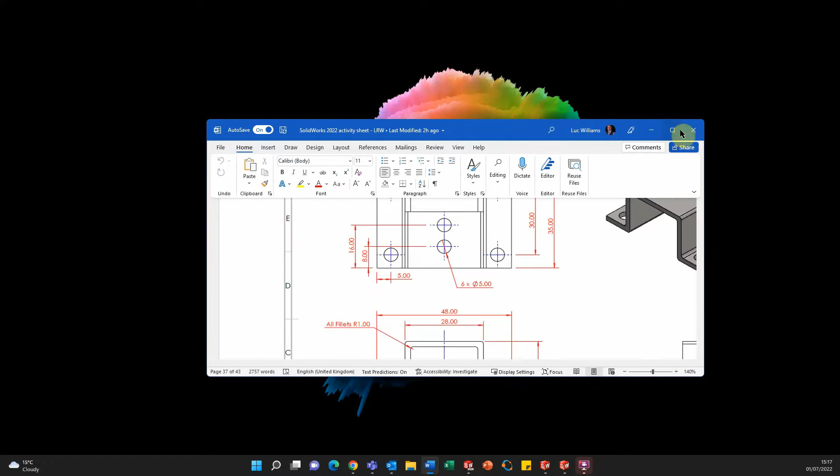Hi, so in this activity we're going to skip forward and look at exercise 4. Reason for this is exercise 3 is the easiest of the lot, far easier than 1 and 2.

You just need to sketch the outline and extrude it to 50mm, then check the weight. This is pure gold, and it's 8.62 kilograms. I'll leave this here for you if you want to have a go at this first.

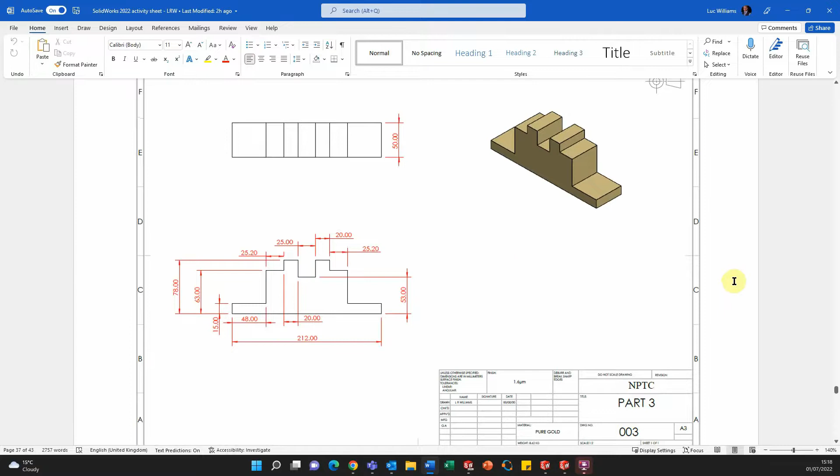So we're going to move on to create a steel bracket. If you want to have a go yourself, pause the video - here are the dimensions for you.

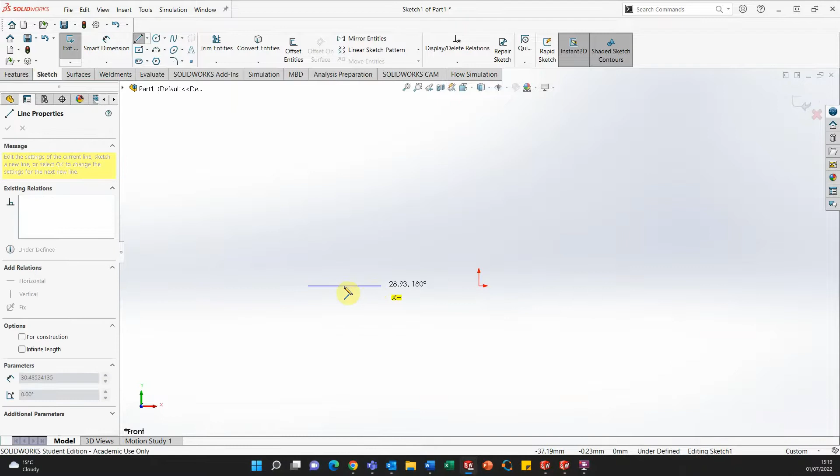Once you have SolidWorks opened up, we want to start a new sketch in the front plane. So what I'm going to do is just draw a rough outline of how the bracket looks - so it looks something like this.

I can make sure that the center of this line is in line with the origin, so I can just create a relation - I'm going to say this is vertical.

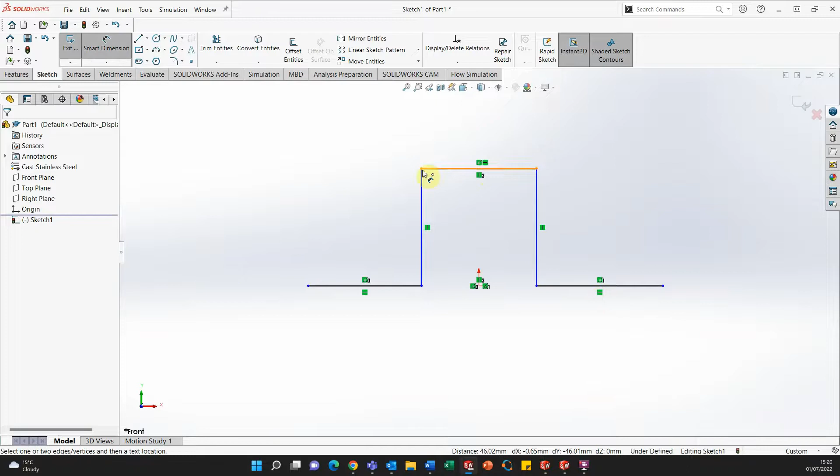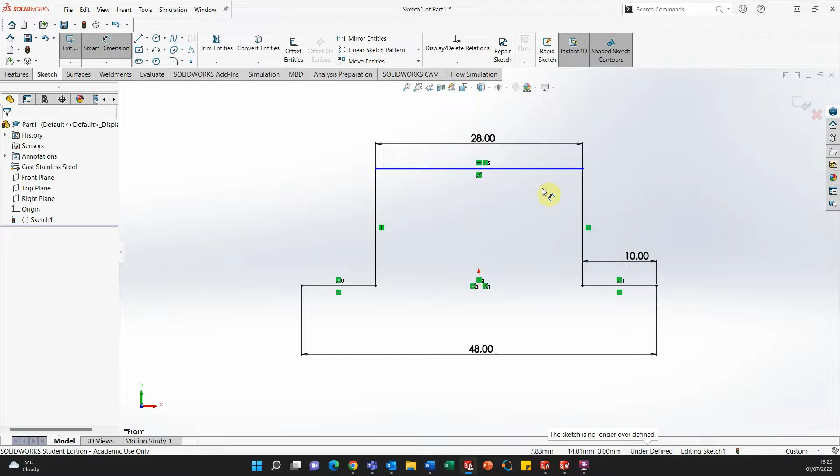Next up, I just need to add the dimensions. So in total, the length of the bracket is 48mm. The upper part of the bracket, the upper surface, is going to be 28. And then the bottom, let's call it flanges, are going to be 10mm each - so click X to dimension. We just need to add the height, so this is going to be 20mm.

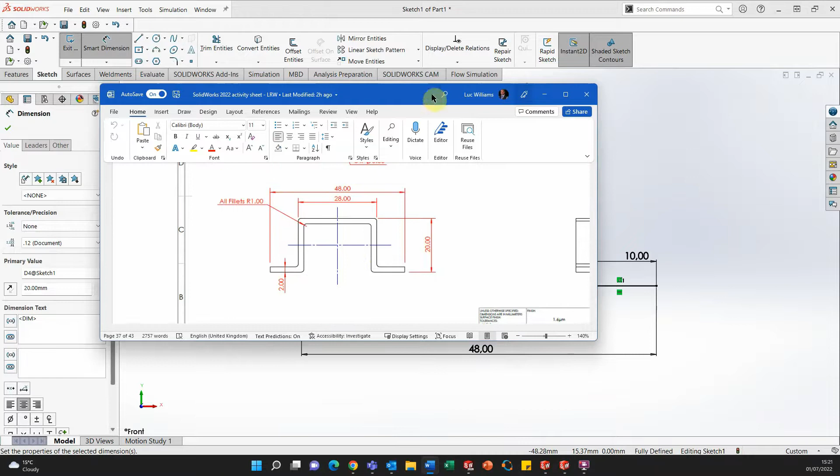Notice how I've only drawn the lines, I haven't drawn the outline like this. So we're going to use a tool called Thin Line Extrude - can help, it's a useful tool, help you save some time.

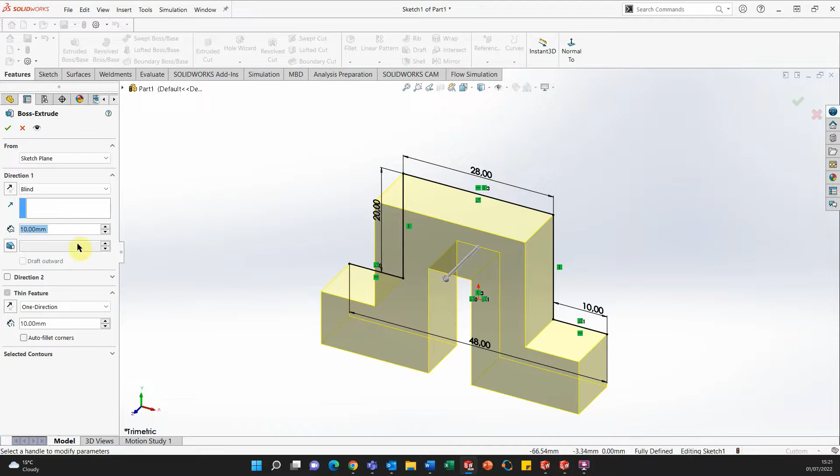So go to Features, go to Extruded Boss Base. Notice it's picked up the line and extruded in the direction to give it depth, and extruded these lines outwards to give some thickness. The total length of the bracket is going to be 35mm. For the thin feature, the drawing says there's a wall thickness of 2mm, so just type in 2 - and you can see this looks more like our bracket now.

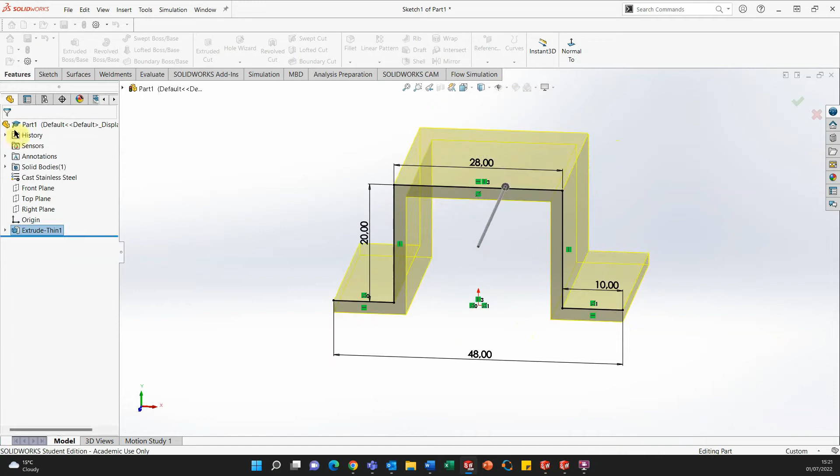Click OK. Alright, now we need to add fillets on each of the edges. So we've got 1, 2, 3, 4, 5, 6 edges we need to add fillets to. Similar to the other exercises, go to the fillet tool, and these are going to be 1mm.

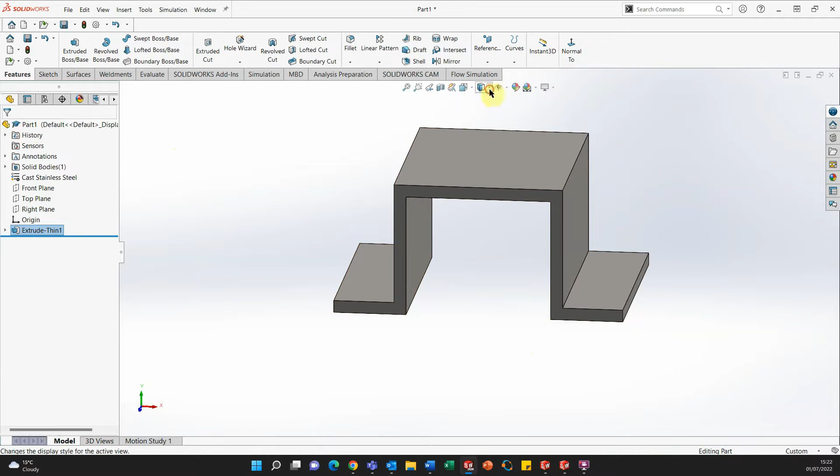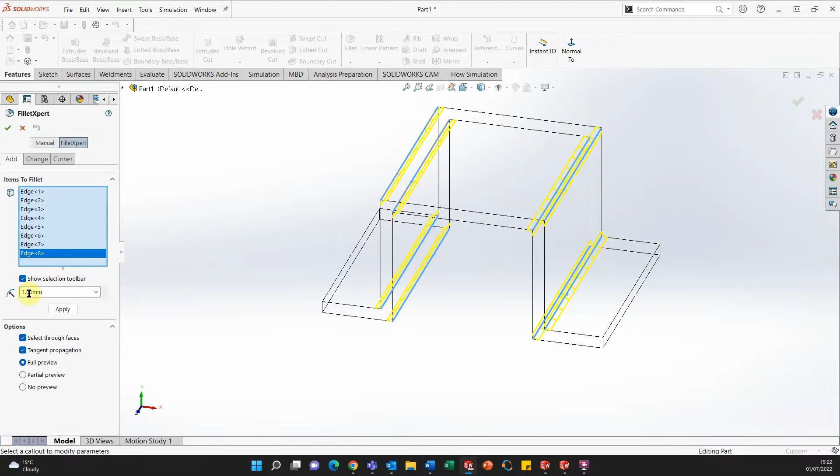Click X. I'm going to change the appearance to wireframe and go to fillet. So we've got this corner, 2 per here - oh, we actually got 8 in total, sorry, not 6. There we are, these are 1mm. Click Apply, click OK, and here we are - all fillets added.

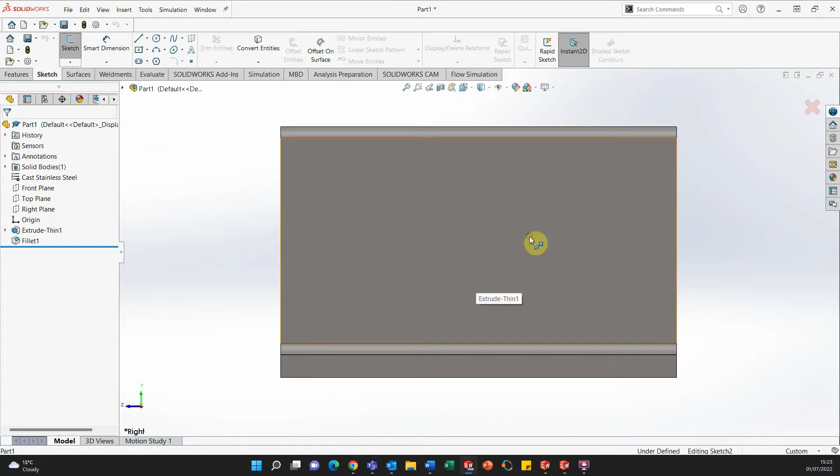So now what we need to do is create a cut at the back end of the bracket by here on the upper surface. I'm going to create a sketch on the right surface, and create a corner rectangle in the upper right vertex by here.

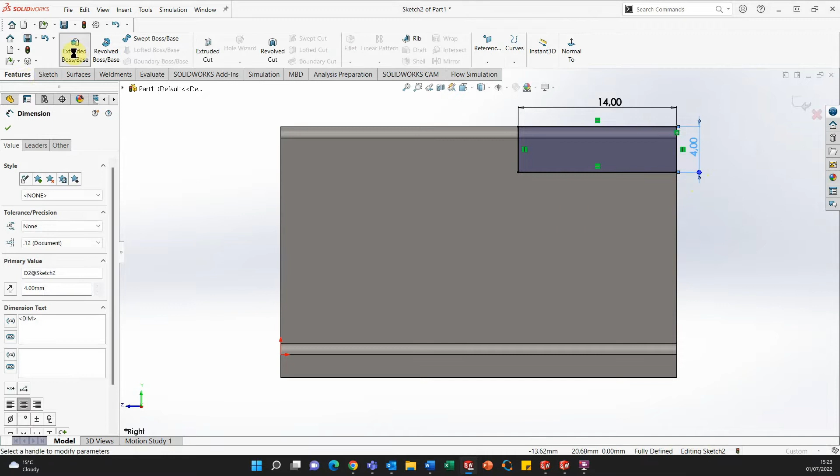Dimension this as 14mm wide and 4mm in height. Just cut that all the way through - oh, wrong button, sorry, extruded cut, through all. Notice it's cut all the way through the bracket. It's okay, so now it's starting to look like a bracket.

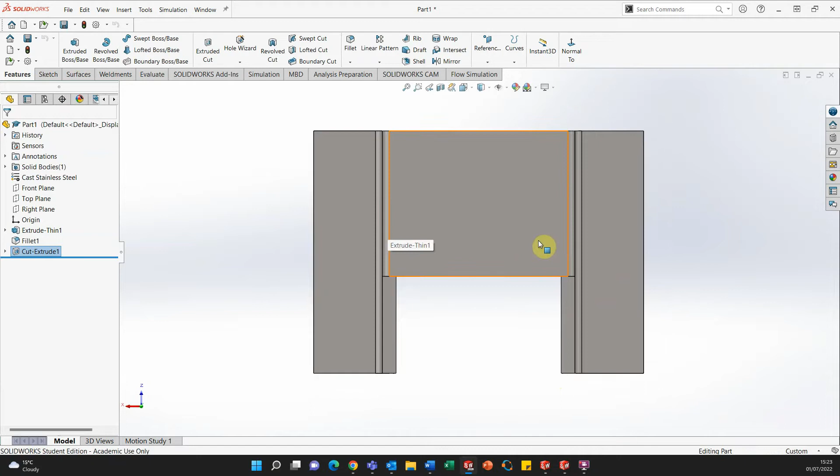We just need to add the bolt holes, or in this case just holes - 2 here on the upper surface and 2 here on these we call flanges. So we go to sketch, I'll start on the upper surface and just draw 2 circles in line with the origin, which are 5mm in diameter.

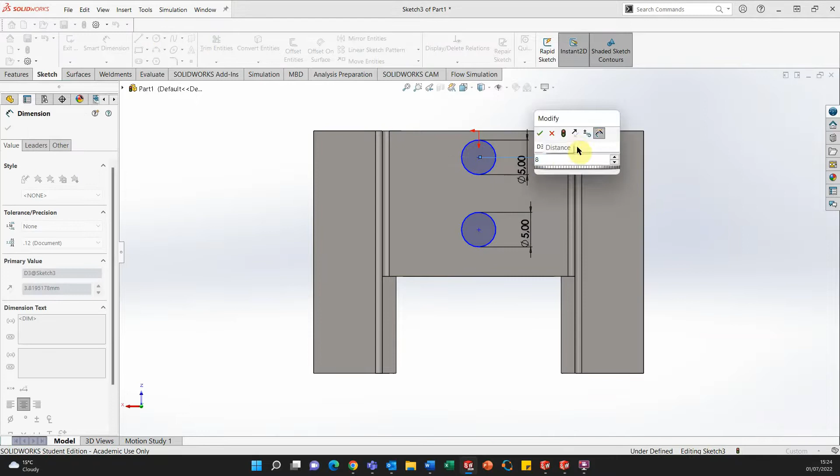From the front, this is going to be 8mm, and this is going to be 16. Notice this is still blue, so I need to add some relations to finish off the sketch. I'm going to make sure these are vertical with each other, so they're in line, and in line with the origin as well. I'm holding the control button on my keyboard, selecting the origin and the center of the circle. So this is fully defined.

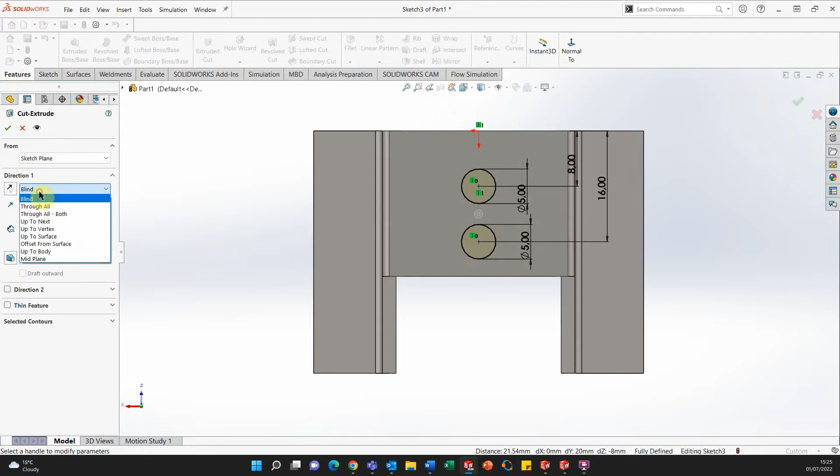Happy days. Click OK, go to features, extrude the cut, through all. There we are - so we're just going to do a similar process for the remaining holes. Just going to draw 4 quick circles - oh, quite large - dimension needs to be 5mm.

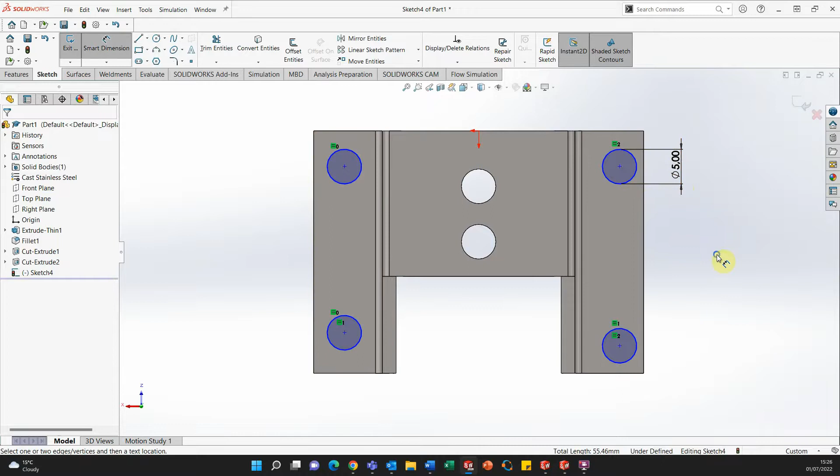I'm going to use relations again to make sure all of these are the same size, holding control and selecting each one - now these are all 5mm diameter. If we look at the sketch, we know this circle is 5mm away from the edge, and these ones are 30mm.

I'm going to add more relations, ensure these are vertical with each other, these are horizontal, and last one, make sure these are vertical as well so when I dimension them it's a bit easier. Referring to the sketch, the holes are 38mm apart, and from the outer edge they are also 5mm.

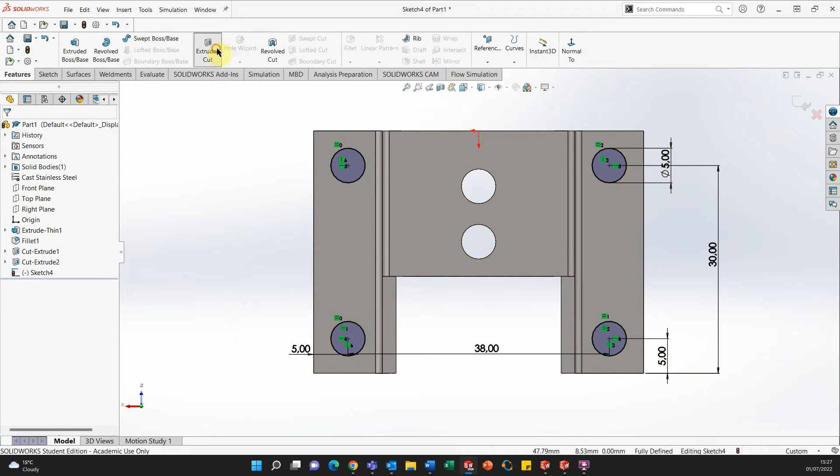I thought I added a relation here, sorry, a relationship - there, that's better. Right, notice all of these are black, they're fully defined now, so I'm happy. I go to features, extrude the cut, through all, and the job is done.

So I'm just going to check the mass of the part, that it is the same as the drawing. Cast alloy steel, 34.6 grams - so edit this material, cast alloy steel, evaluate this, mass properties. Yeah, okay.

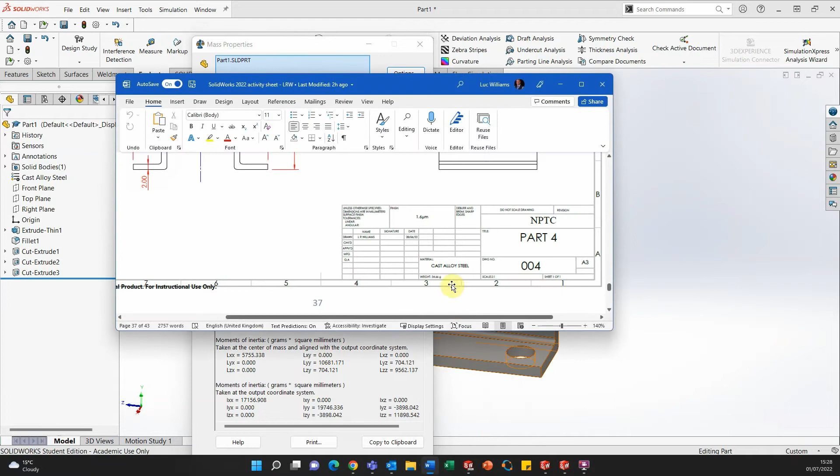If you can't, an easy way to convert these is just change the settings. So we've got 36.7. What did I have in the drawing? 34.66 - seems slightly off, 2 grams off. So what do we got here?

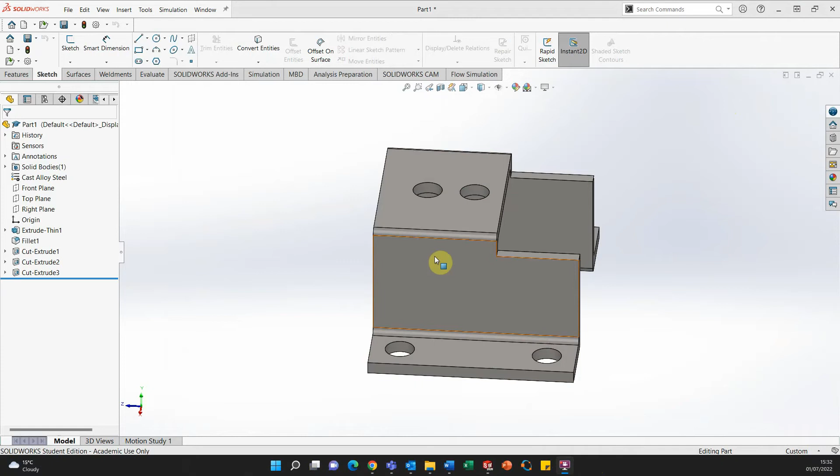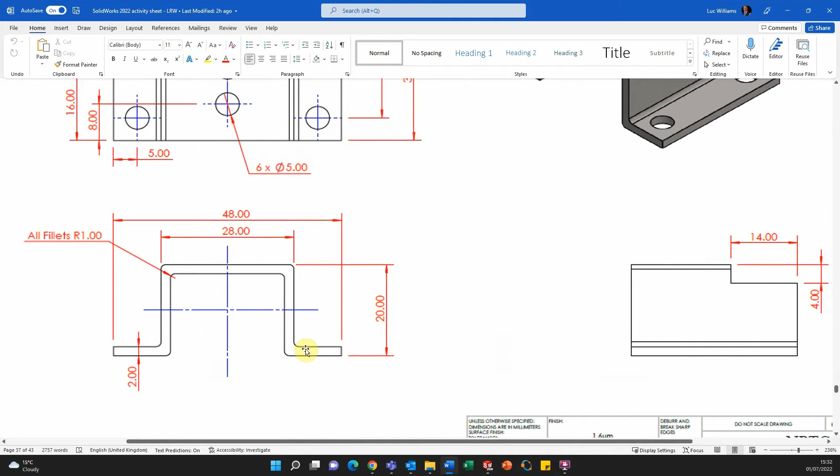Okay, so small mistake right at the start, but we can change this quite easily - this part is just slightly larger than the drawing. It was my mistake when I was using the thin extrude feature. If we look at the drawing, we notice that this dimension here is 20 millimeters. So my mistake when I created the thin extrude, as you can see, the line here to there is 20 millimeters - so I got an extra 2 mil thickness per there.

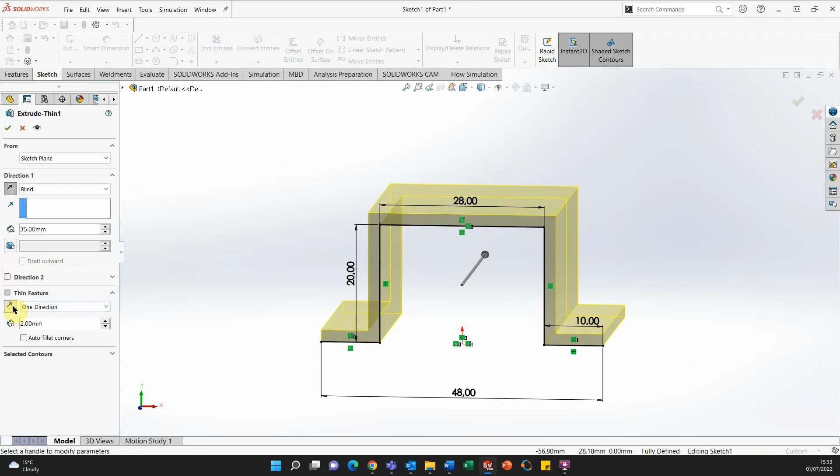Alright, so what I can do is just edit this to be 18 millimeters. I need to go back to the sketch - if I just change this to 18, okay.

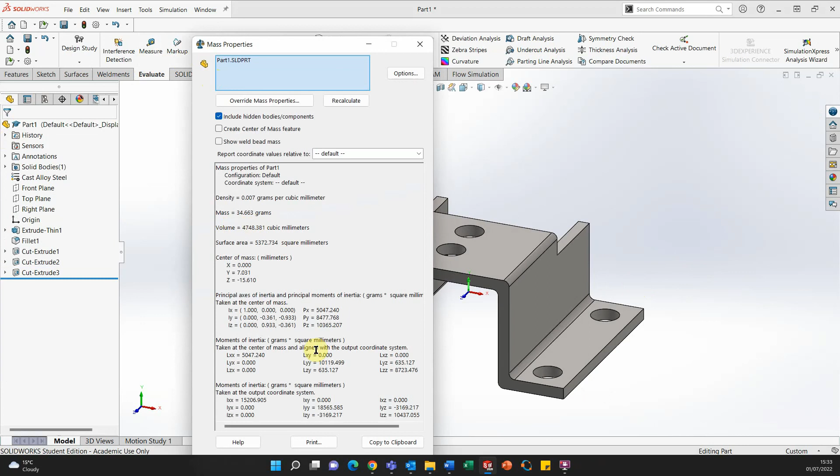A good thing about SolidWorks is we can change mistakes quite easily - well, sometimes they're easy, like this. So when I check the mass properties, it's 34.66, which is correct. See you in the next video.